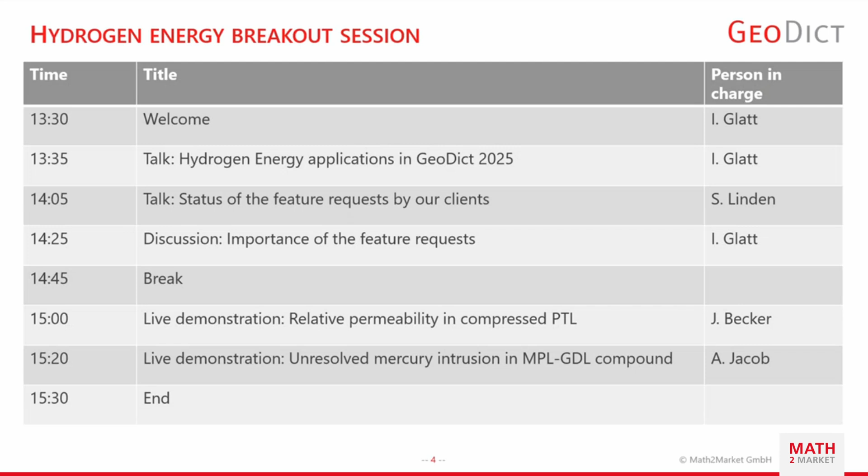So I will start with the applications in GeoDict for hydrogen applications. We've heard a lot about GeoDict 2025, which is new and out now. Maybe you're asking yourselves, what does that mean for me as a hydrogen researcher? I will answer that question, but not only for GeoDict 2025, but also for GeoDict in general.

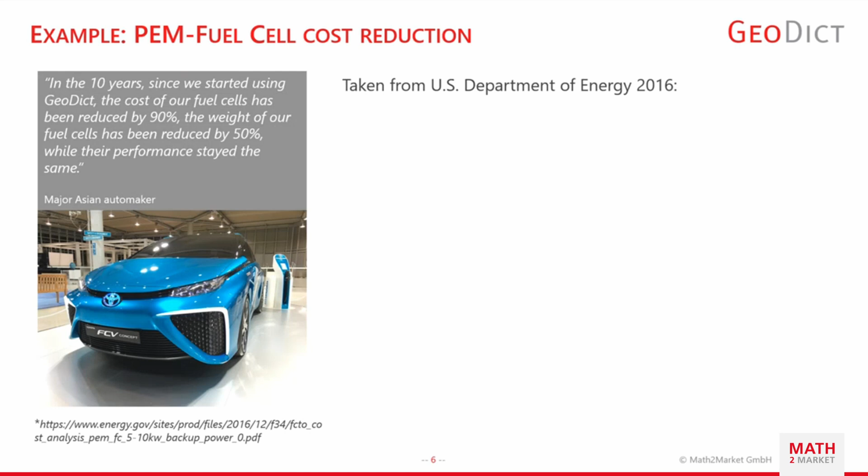To do so, let me give you an example. One of our clients once said, in the 10 years since we started using GeoDict, the cost of our fuel cells has been reduced by 90%, the weight of our fuel cells has been reduced by 50%, and the performance stayed the same. So what does that mean? If you follow on with an example, just imagine we would be talking about the Mirai. That's just an example, I invented that. And I have some numbers taken from the US Department of Energy from 2016, which is almost 10 years ago.

We imagine we have an annual production volume of 50,000 fuel cell stacks, and for this production volume, the MEA assembly, the membrane, GDL, MPL, and catalyst layer together, is roughly $12 per kilowatt in production costs. So if you assume that, and you assume also the power of the fuel cells in a Mirai of 128 kilowatt, the production cost for the MEA for one Mirai is roughly $1,500, and the yearly production of the Mirai is 30,000 per year.

So with the 90% reduction in production costs, we would save 40.5 million per year. So that's just an example, of course, but to give you an idea, I think it really serves well as a nice example.

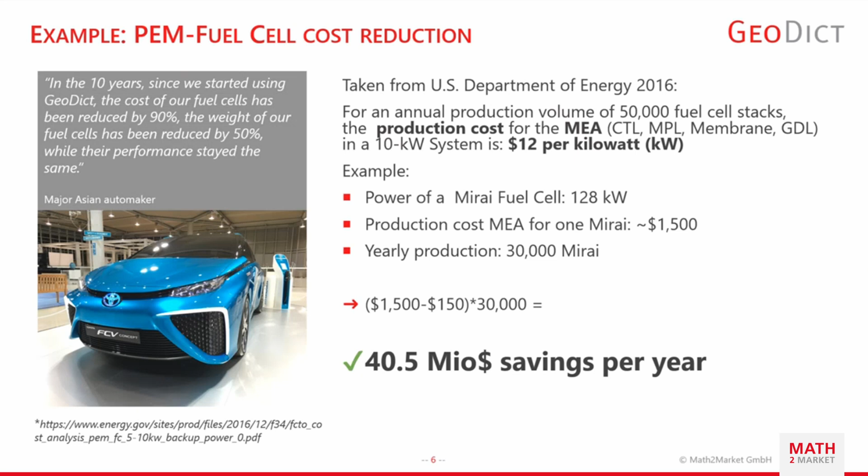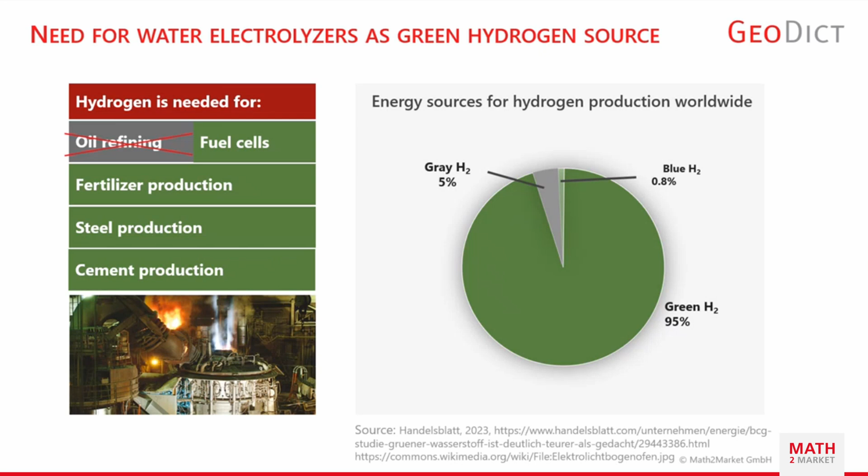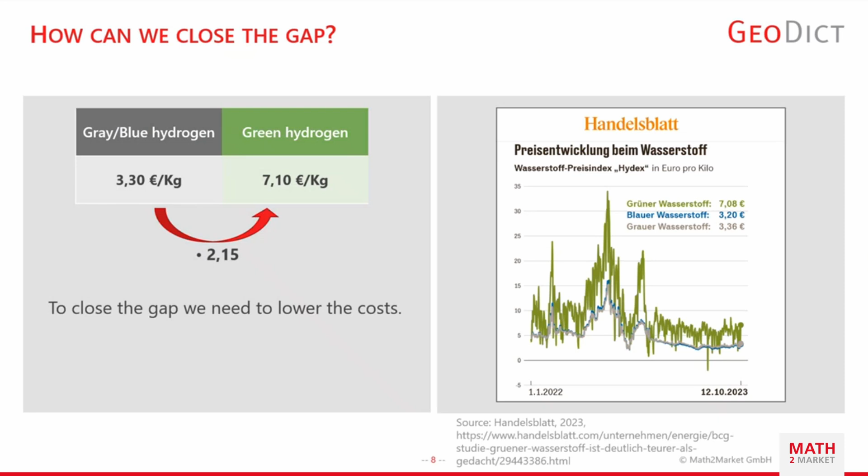So why isn't that the case already? That would be really cool, so why not? The answer is very easy and very hard to solve. The gray or blue hydrogen costs much less in production than the green hydrogen. So less than half the price. So what we need to do is to lower the costs, to close that gap between the costs for these two types of hydrogen.

And one way to lower the costs would be to improve on the performance. I know that's not the only thing that needs to be improved, but it's one part in the puzzle, improve the performance of the electrolyzers. And the question is not why to improve the performance, but how to improve the performance.

What can be done? The performance of the electrolyzers, and also for the fuel cells, is determined by transport processes inside of the MEA assembly. So we have to transport electrons, we have to transport gases, and we also have to transport water. That's true for the electrolyzer as well as for the fuel cell. And the network for the transportation needs to be well organized, like in a city. If you don't have it well organized, you will get traffic jams and obstacles, so the transport will not work smoothly.

And this is how the performance of the fuel cell can be optimized, by optimizing these kinds of pathways in the MEA assembly. And this is where GeoDict can be of use. To connect the microstructure properties or the transport properties that you determine in the microstructure to the performance, you usually have a 1D performance model, or maybe 2D, but at a larger scale. And you need input parameters to run that model. And these input parameters at least partly depend on microstructural properties.

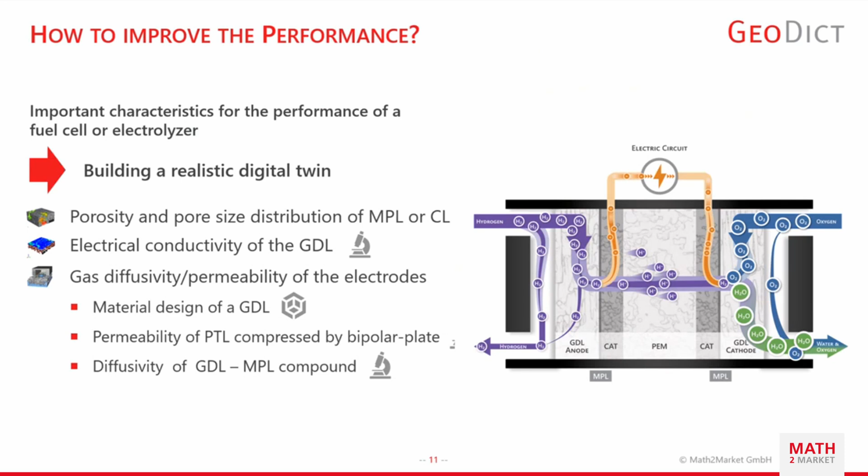And there's one thing we need to have a look at all of these examples. We need to have a structure. We need to have something that we can work on. And what we do here is we have a realistic digital twin of a real material in the digital world. So it's just a copy, so to say, in the digital world of the real material. And how do we get that? Let me show you a little bit how you get a structure into GeoDict, which we then can call a digital twin.

So the most straightforward way to get there is you would have a 3D scan. In this case, you can see a micro CT scan of a gas diffusion layer of a fuel cell. And if you scan it, you get gray values from the CT scan, and you can import this into GeoDict, and every gray value will become one material phase. And then you can reconstruct it in 3D, and you have a representation of the real material in the digital world, which you can already call a digital twin.

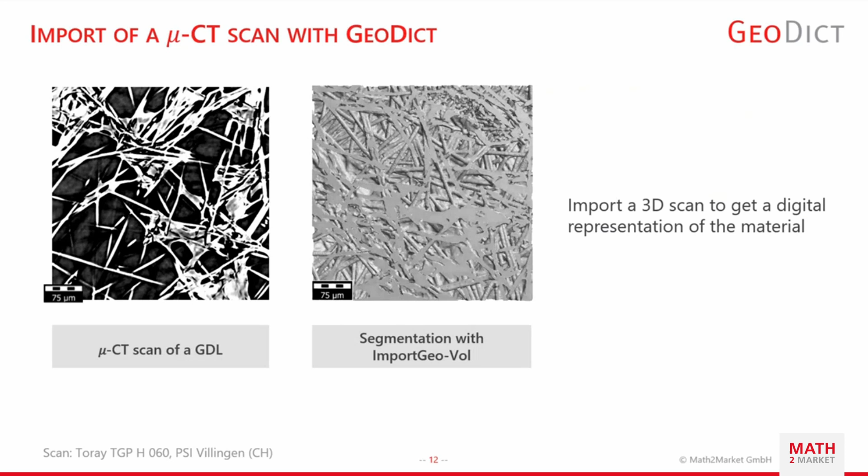So remember, if you have a digital twin like that, you have an exact representation of your material in the digital world. And in the case of the GDL, the individual fibers are exactly those as they are in the real world. They have the same location, same thickness, everything same. And the properties on the macro scale are identical to the original material. For example, you would have the same permeability of the material. That would be a digital twin.

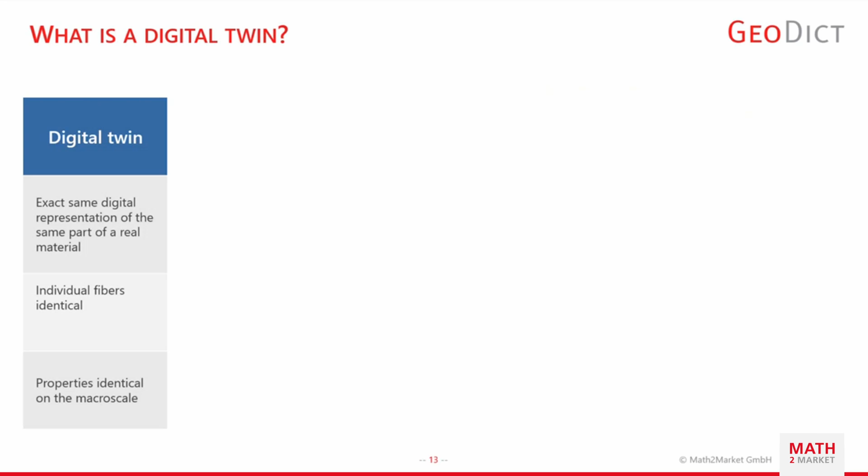Then we have a concept of a statistical digital twin, which is very similar, but not the same. With a statistical digital twin, you would have a digital representation of another part of the material. If you look at this image here, you have a carpet, and we have two different patches of this carpet. You would have the fibers in different locations. They would have maybe different thicknesses, the individual fibers, but in the statistical sense, you would have the same properties. It would have statistically the same fiber distribution, fiber length distribution, thickness, curliness. So you would end up with the same properties on a macro scale, like, for example, the permeability.

So if we want to do material design, which is what GeoDict is really good at, we need the statistical digital twin to be able to alter the material. For example, say we want to have a different fiber length distribution to end up with different properties on the macro scale. As long as we have the same properties on the macro scale, we didn't do any designing, right? So if we want to do designing, we have to alter the material. And this is what we need a statistical digital twin for.

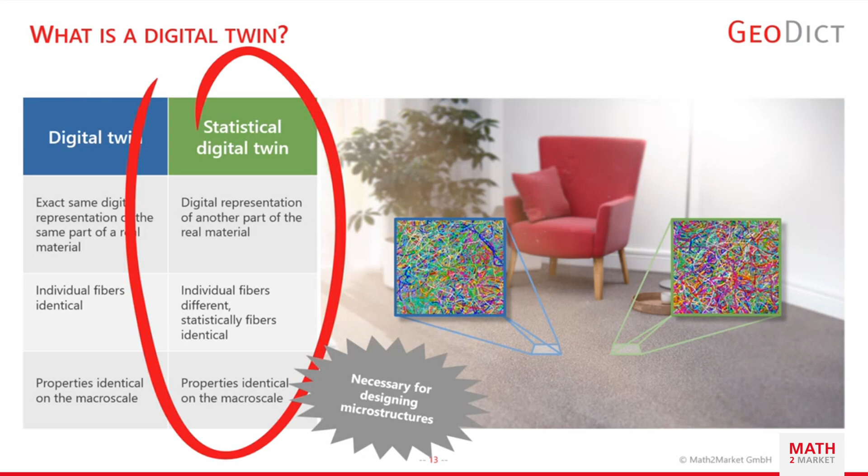In GeoDict, you have several options to create these statistical digital twins or structures in general. For granular structures we have options, and also for fiber structures, and also for sintered structures, which would be valuable for SOFC fuel cells especially. And then we have some options to make it a little bit easier to create realistic structures.

For example, we do have an agglomerate generator, which creates these kinds of agglomerates that you can see on the bottom here, like these here. And you can use these agglomerates and put them into a volume and generate a structure which is constructed out of these agglomerates. This is very helpful if you want to create, for example, a catalyst layer, which is done here in this example, because a catalyst layer consists of these kinds of agglomerates.

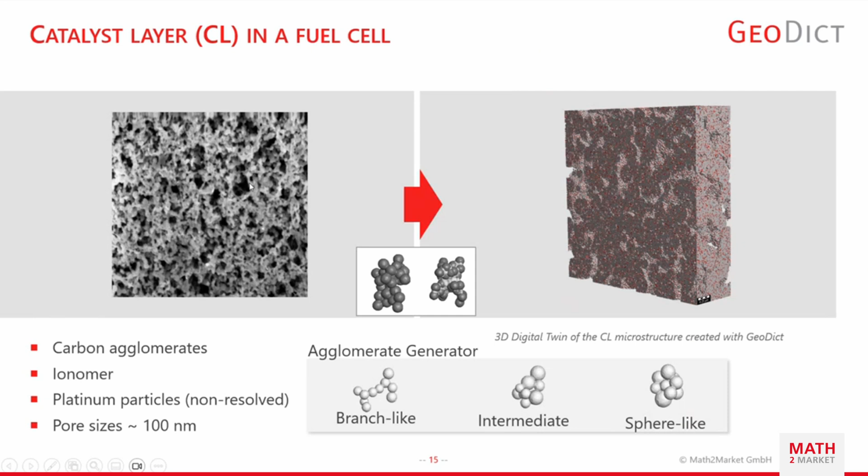And then you usually have a covering of ionomer, which you can add later on, and platinum particles and so on. But these kinds of agglomerates give you the typical pore size distribution that you have in this kind of layer. So you have large pores, as you can see, for example, here in the scan, but you also have these smaller pores in between the particles. And it's much easier to achieve if you have these agglomerates to start with.

That's another thing that we already heard about in the plenum session, the 2D to 3D app, where you can use 2D scans to get a 3D structure. I was actually impressed by the 3D TEM scans. But if you have TEM only in 2D, that's a different thing, of course. Same for FIB-SEM scans. FIB-SEM scans are very difficult to get, especially for the microporous layer, or even worse, the catalyst layer, because they're very, very small particles and it's mechanically not very stable.

So if you want to have a good image of that, I have never seen one, which is actually one of the reasons why we started with the SOFC cells for the 2D to 3D app. Now it's also working for battery structures and for fiber structures, but we're still looking for a really good scan of an MPL or catalyst layer. So if you have a really good scan of an MPL or a catalyst layer, we would be very interested to work with you on creating or improving the 2D to 3D app using that kind of scan. So please let us know.

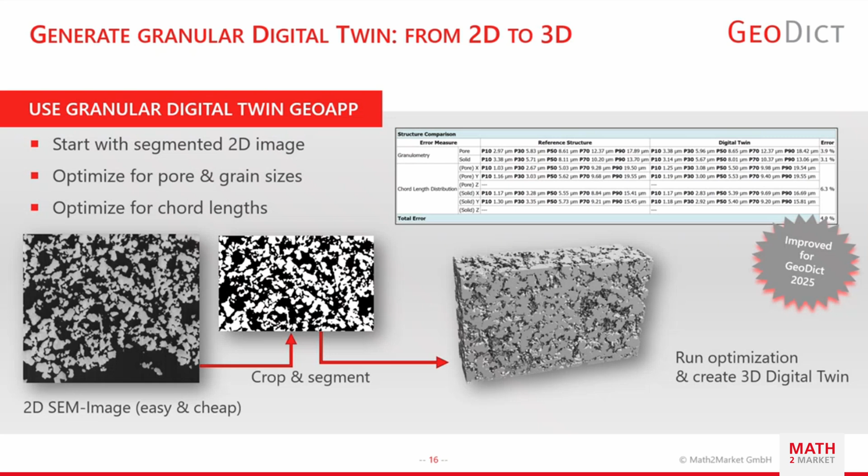And the exact same graph you get in GeoDict if you run a mercury intrusion experiment. Then you can compare the digital experiment with the real experiment and see, does it fit? If it fits, you're probably fine. And you can go one step further with the simulations, because with mercury intrusion, you only get the throats of the pores, or the sizes of the throats. And for the transport, it's also important to know how big the pore is inside, so the pore body. And this is something that you can get with GeoDict.

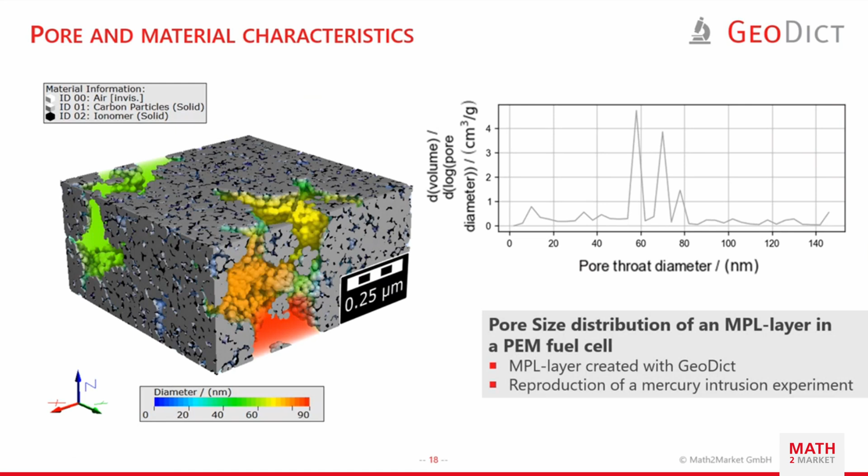What you can also do in GeoDict is visualize the pore sizes in 3D. So here you have in 3D in color the size of the pores, and you can just see how big the pore is that I'm currently looking at. For example, this pore is in red, so that means I have a very big pore here. Here are very small ones, they are blue color coded. So you have two options, either reproducing the experiment or even going one step further.

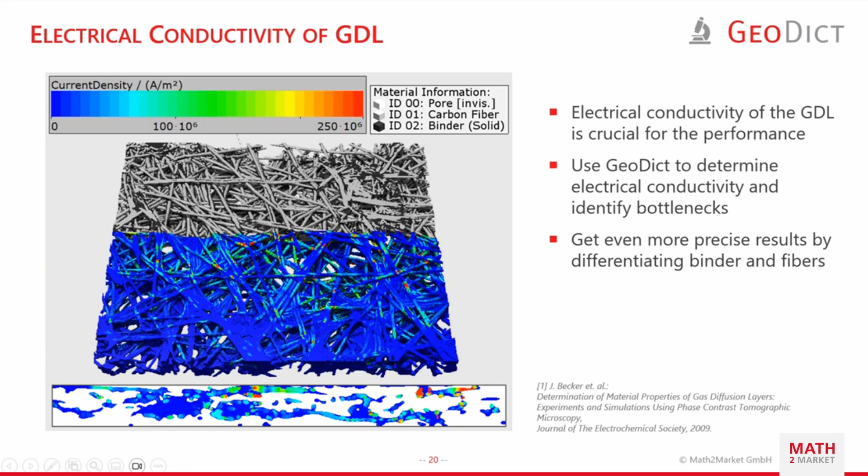So you've seen the porosity analysis, and now let's go to the electrical conductivity of the GDL. What you can see here in gray is the gas diffusion layer of a fuel cell, and you can calculate the electrical conductivity of this structure, and you get, for example, current densities in 3D, and you can see if you have any problematic areas, like for example here in the red ones, or here in 2D. You can also analyze it and slice through and see in more detail where there could be any bottlenecks for transportation.

So let's move on to the most difficult task, so to say, the gas diffusivity or permeability of the electrodes, depending on the water saturation or on relative values in any case. We will start with the materials design. So it's a design study which has been done quite a few years ago of a gas diffusion layer.

I think it was done by Jürgen Becker. So if I tell something wrong, please correct me. It was, I think, in 2009 it was done. There will also be a citation later on.

You could also assume different or more complicated ways of how the water enters into that layer. But for this study, it's not the important part, actually. So we'll leave it with that way, and we'll start saturating that layer from the bottom. The idea here is, we can just have a look how that saturates. So we have the water entering from the bottom and saturating the gas diffusion layer until it's more or less completely filled.

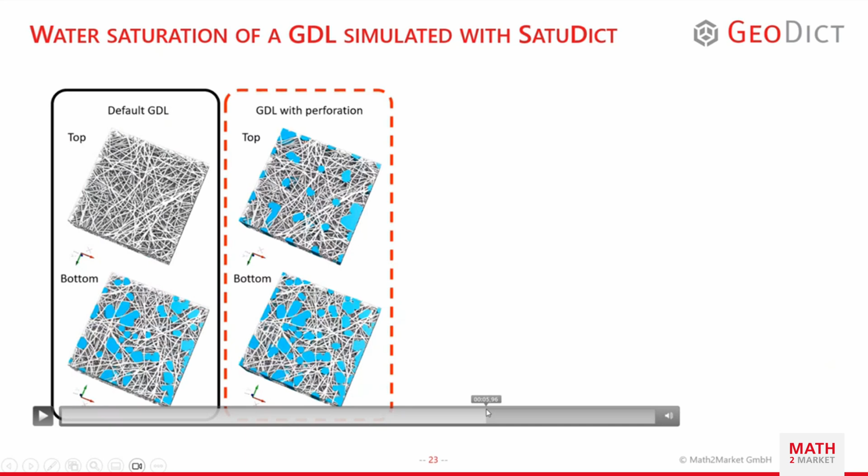So let's see how the saturation looks like. So it starts at the same location. And you see, okay, at least qualitatively, that works. We have filled the holes first. The punched holes are filled with water while the rest is still open for the gas transport. Does it also work quantitatively? Well, let's have a look at that.

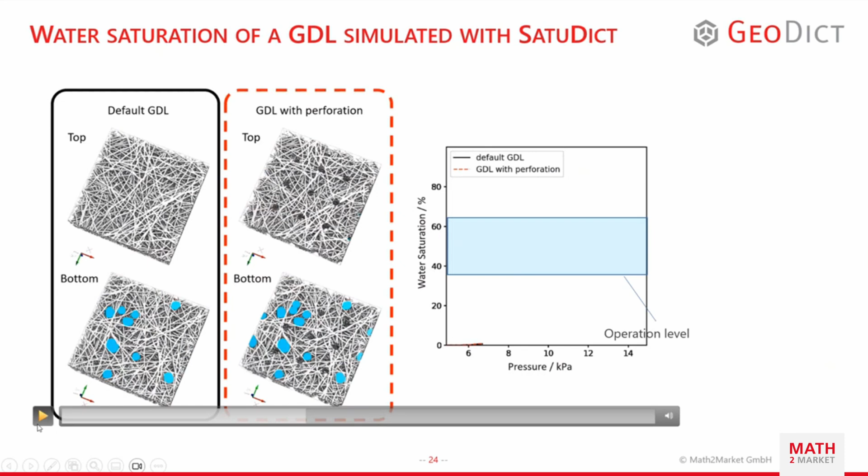Wait a second. If we look at the graph here, on the y-axis, we have the saturation with water in percent of the two GDLs. And on the x-axis, we have the pressure that is needed to get the gas through the structure. And if I let the video run, we can see that for the perforated GDL in red dashed here, we get a different graph than for the default GDL.

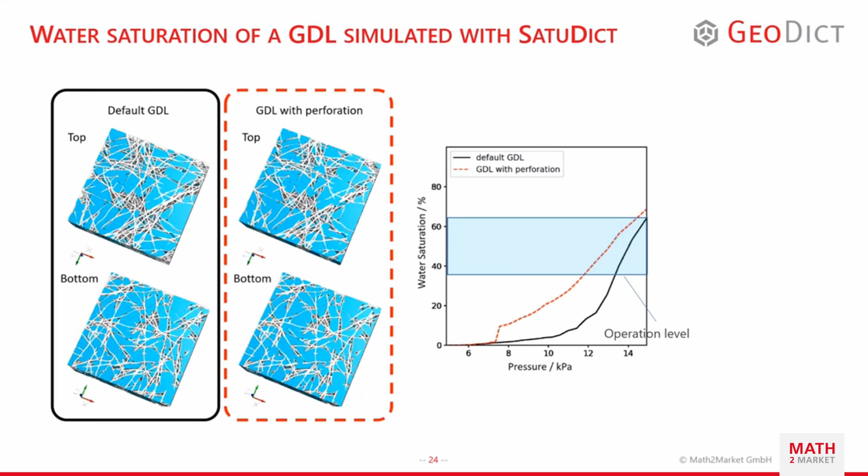And in the typical operation level, it's actually a little bit wider than it's shown here, but more or less. So in the typical operation level, we see that we need less pressure for the gas to go through at the same saturation level than for the non-perforated GDL. So in this study, the structural design, the material design worked out. The water fills the perforation first, and it leaves the smaller pores for the gas transport, allowing for higher permeability at the same saturation.

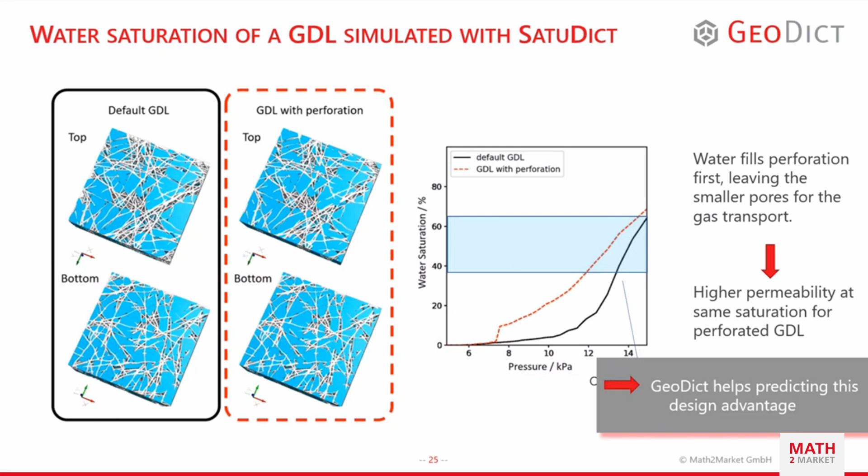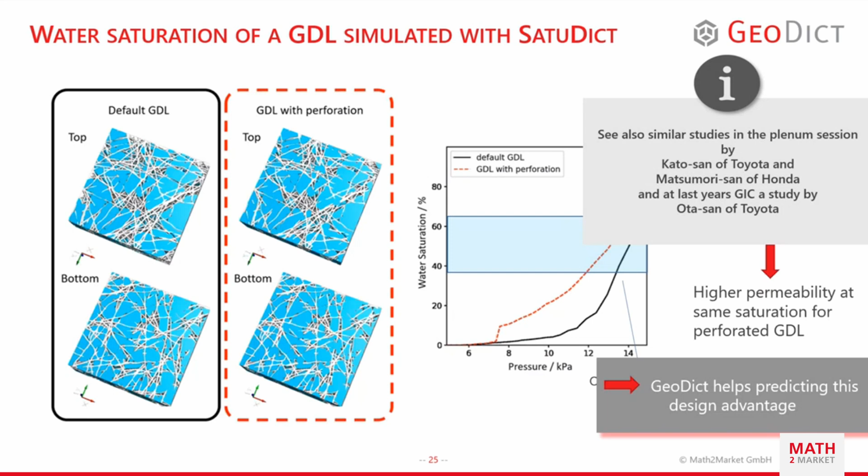Yeah, we have already seen the plenum talks, so we can refer to that. And this was the real world. I mean, this is a study which is done in a publicly funded project, and you're doing the real research, for real applications. Now let me show you a little bit what the permeability of a PTL compressed by a bipolar plate is good for. We're talking about electrolyzers now, but it would be also true for fuel cells if you look instead of the PTL at the GDL.

And if we want to go into a performance model on a higher scale, we need to enter a permeability value. And the permeability that we get from the relaxed structure is different than the one that we get from a compressed structure, of course.

The trouble is if we measure, or if we image the PTL with a scanner, it's usually in a relaxed state. So if you use this image of the relaxed state and calculate the permeability or the diffusivity of the structure and enter this into the performance models, it will probably not be the value that you have during operation. So if you want to have the value that you need for simulating operation conditions, you need to use the compressed structure.

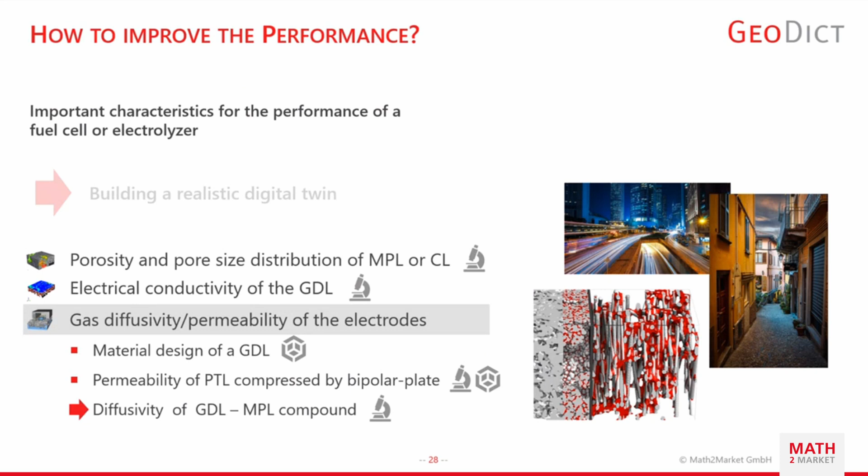So the last example I want to talk about is related to the last talk in the session here, which is the mercury intrusion curve that you get from the compound of the fibers and the microporous layer. So why would you want to do this? Well, scans of the microporous layer or catalyst layer are very hard to get. We already had this topic.

So what you usually do if you want to have a scan of this compound, you scan it together with the GDL. And then it's usually not resolved. So the MPL is not resolved, or you can't really resolve that. So what you can do in GeoDict now is you assume a porous medium for the microporous layer, the one here on the bottom. So for each voxel, you have pore inside as well as solid material. And you say, okay, my porosity, I know that, can assume that.

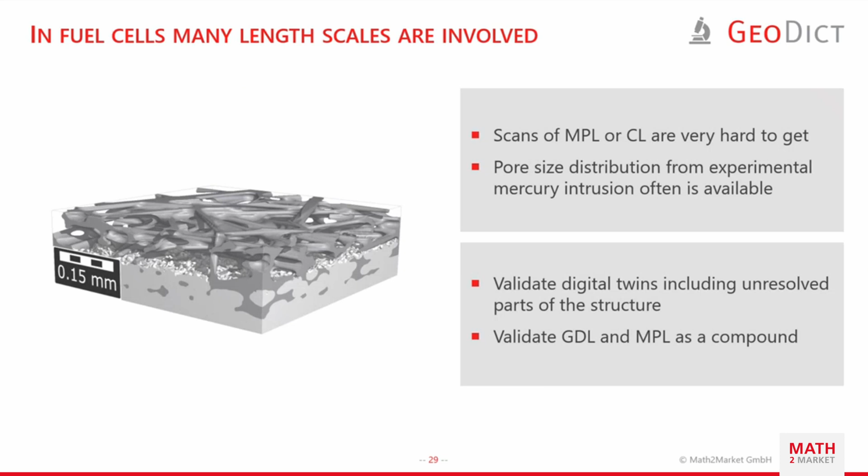And then you can calculate the mercury intrusion for this entire compound. And you get then the analysis for this entire structure. You can use that again for going into performance models as an input parameter. All right, so that was what I wanted to show you as an introduction to this session.

The most important thing is the microstructure directly influences the performance of the fuel cell or of the electrolyzer. And GeoDict can help you to design that microstructure in a fortunate way.

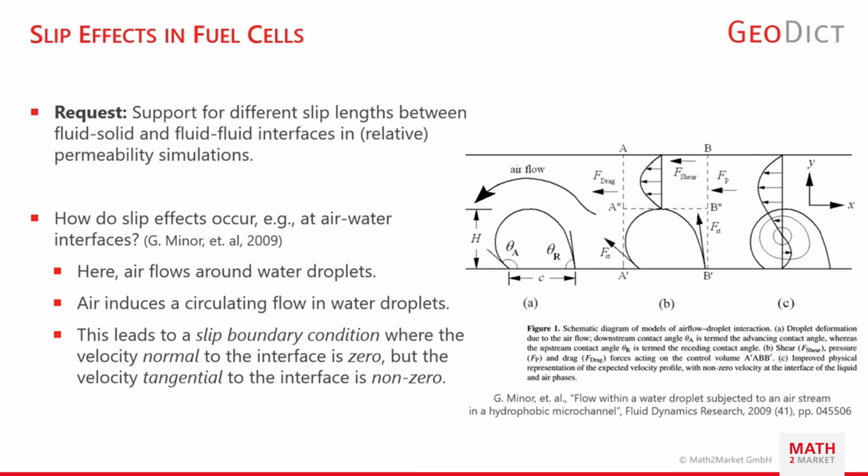What happens now if the airflow is fast enough, you get a circulating flow in the water droplet. On the right part of the image, you see a circulating flow inside the droplet, and this leads to slip flow like boundary condition at the interface between air and water.

What you can currently do is emulate this kind of feature with GeoDict and FlowDict. So what you can do, for example, is a two-phase flow simulation with the capillary pressure command, and then you get a sequence of different water and air distribution. Now you're not using the relative permeability command in GeoDict, but you go to FlowDict and compute flow.

But before you do this, you can use the dilation command in ProcessGeo, and you dilate. For the example from the slide before, you dilate from the air into the water and then do the flow simulation. This emulates slip flow behavior between air and water, but you still have no slip between air and, in this case, the fibers.

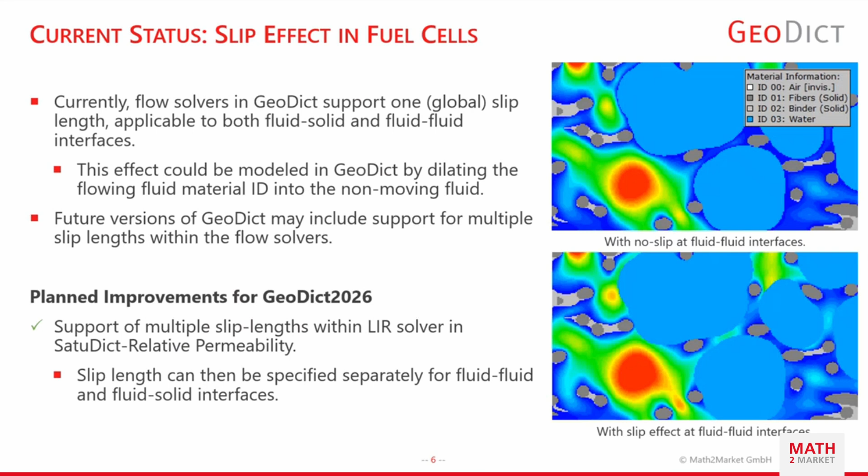So you can already do emulation of this boundary condition. What we plan to do in the next GeoDict versions is allow you to specify different slip lengths for the different phases. This we can do in the flow solver. It's not available yet, but this can be implemented, and it may be implemented in GeoDict 26.

The next feature request is about improving the mesh export. The request was to have more stable mesh export to be compatible with other simulation software like COMSOL, ANSYS Fluent, or Abaqus. This is important because customers may already have a software environment, and they want to use their own simulation software, but they want to use the structure generators from GeoDict.

This can be difficult sometimes because meshes can be quite big with a lot of triangles, and other software then has a hard time importing and meshing it for their simulation. Sometimes importing fails, maybe because of self-intersection of the mesh. If you do coarsening, you can introduce errors.

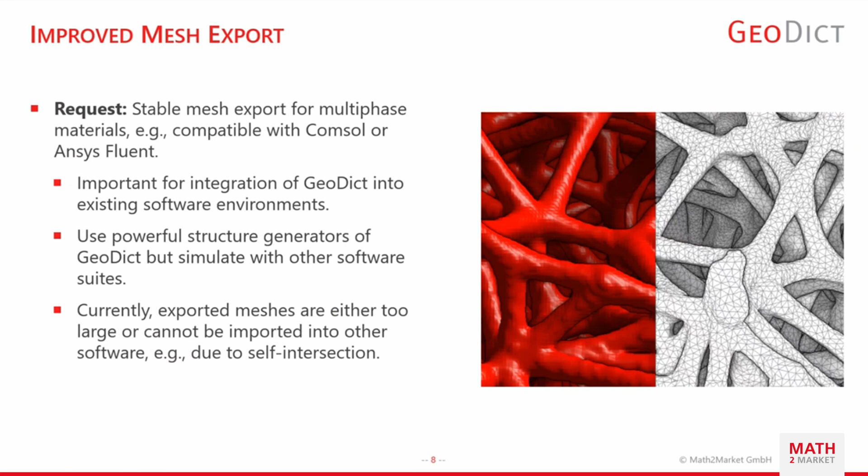So here we want to do major improvements, and this is scheduled, and we are already working on this. In the last month, workers started doing improvements here. We want to improve remeshing algorithms to decrease the number of triangles but preserve high quality meshes, especially where two materials touch. We will do more work on this to make the exported meshes better compatible with simulation software.

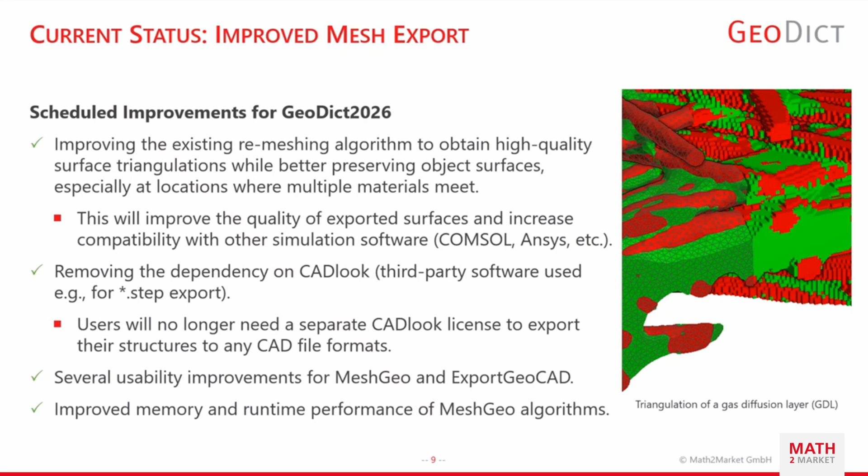Another thing we want to do is remove the dependency on CADlook. If you want to export a mesh in the so-called STEP format, you have to buy another license, a CADlook license, and this makes it more complicated for the user because you need a GeoDict license and a CADlook license, which isn't so nice. We want to remove this dependency and replace CADlook by something else. What else, I cannot tell you now, but we want to remove it and make it easier. And of course, other improvements, reducing runtime and memory and so on.

Hydrogen flows through the anode side, and some parts of it will lose its electron and travel as protons through the proton exchange membrane. On the cathode side, it will merge together with oxygen through the oxygen reduction to form water vapor. For research, the cathode side seems more interesting because here you have water production, and water can condensate, which makes it much more complicated. So research happens on the cathode side.

Research questions include: is enough oxygen always available for the oxygen reduction reaction, since performance depends on this? How well is water transported out of the cathode side? And what about the platinum? The oxygen reduction happens at places where you have platinum, which acts as a catalyst, and how well the fuel cell performs depends on the distribution of platinum and how it influences oxygen diffusion.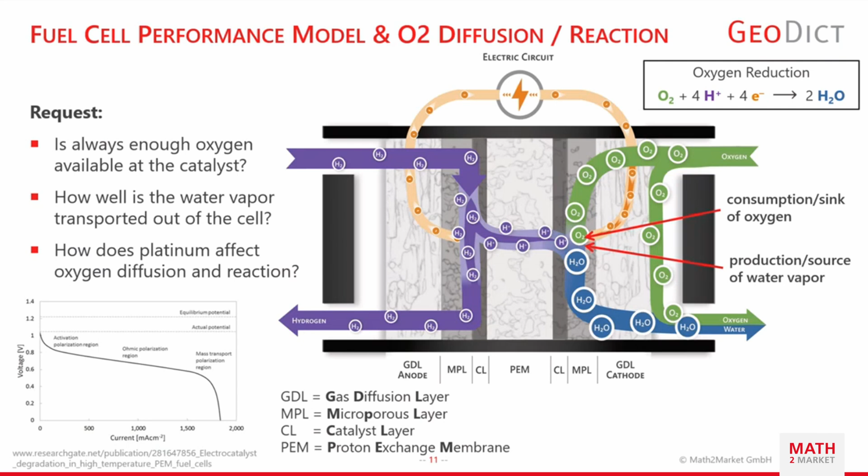What you can already do with GeoDict 25 is simulate the transport of oxygen and the transport of water vapor, not liquid water, but water vapor. Tomorrow my colleague will give a talk about our new transport solver available in GeoDict, which allows transport of concentration on a given velocity field.

We can use this in combination to simulate this phenomenon. So if we assume we just have air as a solvent, with oxygen and water that stays as vapor, and if we assume enough protons and electrons, constant temperature and pressure, and that the microporous layer and catalyst layer are not resolved, we can do the following.

First we run a flow simulation through the fuel cell, then we use the transport solver to transport oxygen and then water vapor, transporting concentration with a velocity. Between different time steps we use an update rule, which can be implemented in Python to apply the oxygen reduction equation. So iteratively, for each time step, you transport oxygen and water vapor, do the reaction in Python, and with that you can simulate an evolution.

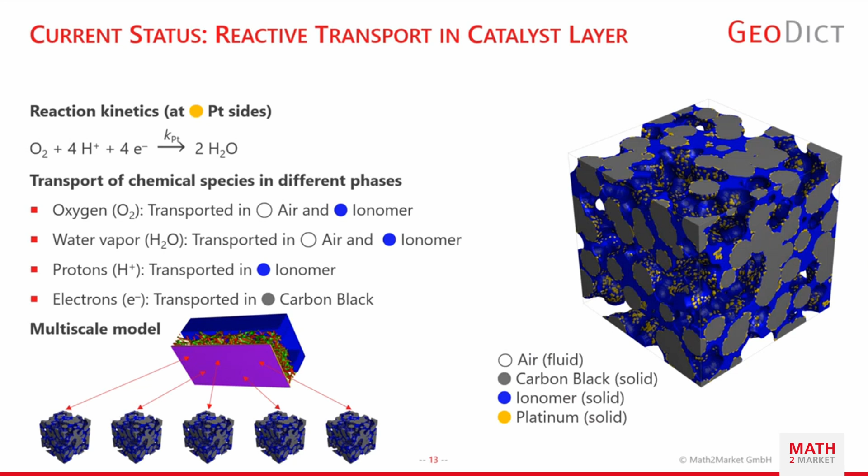So the last topic will be about 2D to 3D. As you've heard, we have two GeoApps in GeoDict 25. With one you can create statistical digital twins for fiber structures, and we have another version designed for granular structures. We tried testing if we can also model a catalyst layer.

It's not ideal yet, but you can already see that it's similar. The reason it's not yet ideal is because there's an internal generator model, as Eric already told you. To get a better match with the input image, some more work would be needed to tune the generator model so it fits catalyst structures better. To do more work here, we also need real images.

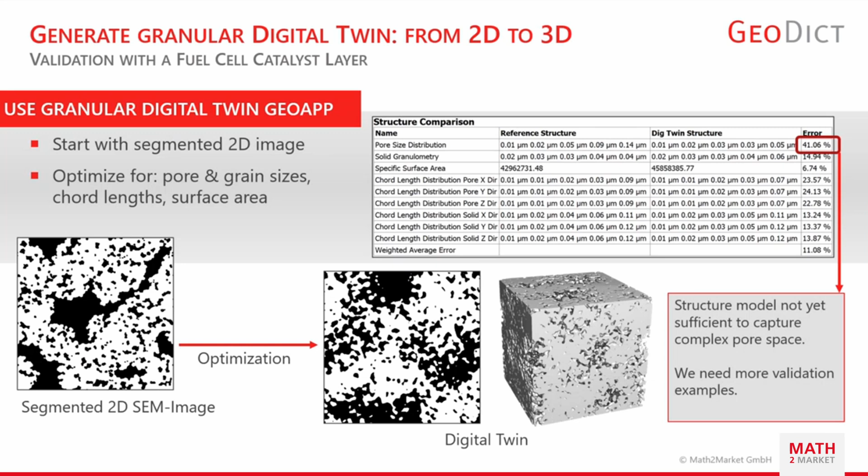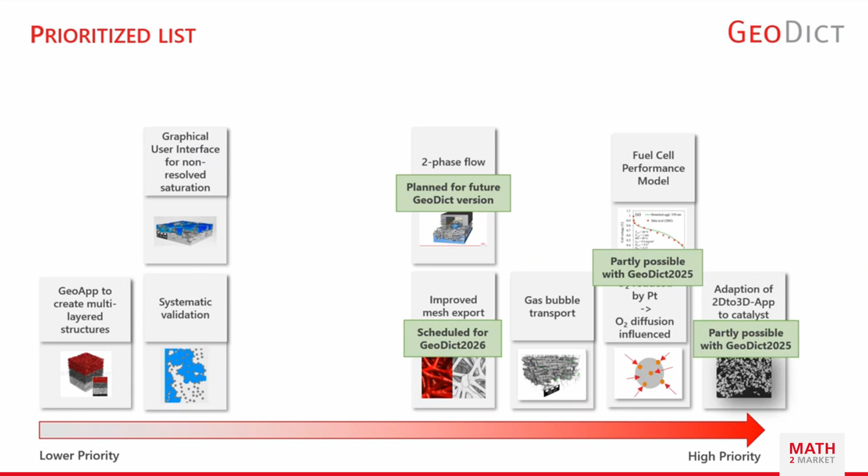So this would be the end of the presentation. Some of the requests are partly possible, and some are planned for future GeoDict versions. That would be from my side. Thank you for your attention and for the discussion.

So we can start now with a live demonstration. The beginning, I think, is not live because you have some introductory slides for that. I already gave the motivation, so I think you will give your own motivation soon. I hand over to Jürgen Becker, our head of the support team.

Thank you, Ilona, for the introduction. I came to Kaiserslautern after finishing my PhD in mathematics in 2005, and then started working at Fraunhofer Research Institute. My first industrial project partner was Ballard Power Systems, so I started working on fuel cell research. Unfortunately, at that time, anything I'll show you in the next 20 minutes wasn't available yet, so we couldn't do all the nice things I can show you now. The topic of the project was doing permeability computations on gas diffusion layers, but nothing of what I'll show you in the next 20 minutes was available back then.

We started working on it, and now 20 years later, it can all be done easily in GeoDict, which is quite nice. So I will show you how to compute relative permeability in a compressed porous transport layer.

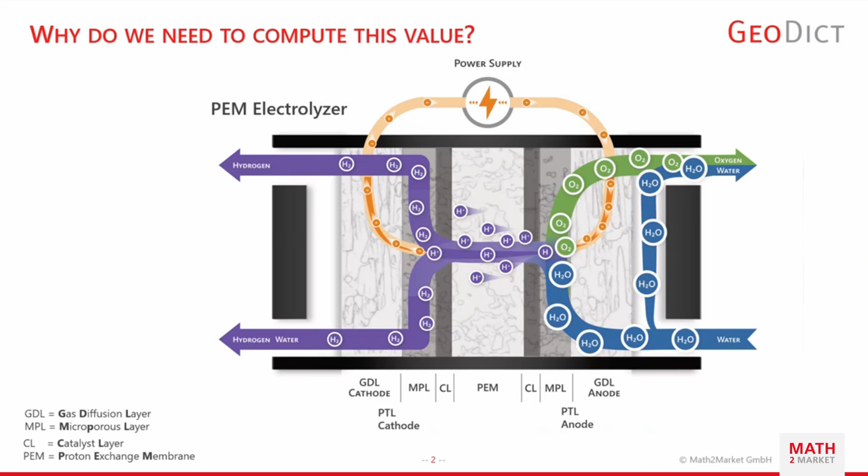Why do we need to compute this value? We're looking at an electrolyzer, where the porous transport layer is a gas diffusion layer or microporous layer. This has to provide gas and water permeability, same as in a fuel cell, and it has to operate under different saturation levels, so oxygen is sometimes present as a bubble. In a fuel cell it's the water in a bubble instead, so it's the other way around, but it's the same question.

The layer is also deformed through the clamping pressure that we have. So if you look at it ex situ on a CT image, it's not the same as when it's built into the electrolyzer or fuel cell. So you have to look at different compression levels.

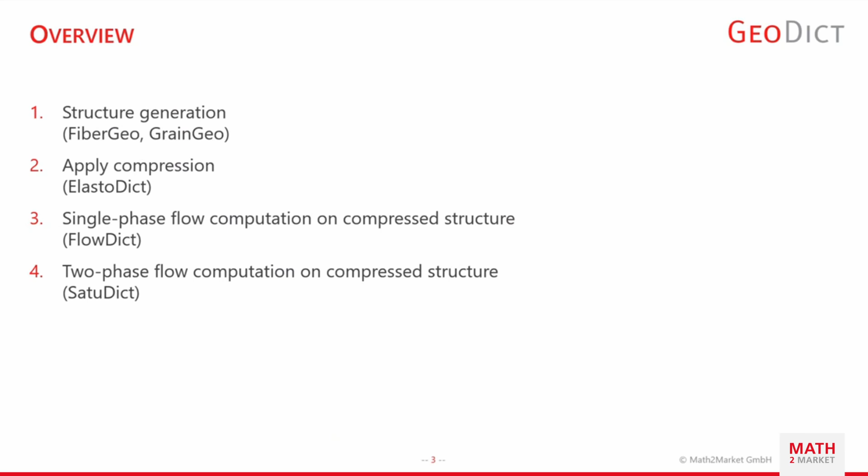I will give a presentation on how to do the structure generation with FiberGeo, GrainGeo, how to apply compression on it, how to do the single phase flow computation, and how to do the relative permeability, which is two-phase flow computation with GeoDict. Of course, not all computations will be quick enough to fit into 20 minutes, so I will sometimes load some pre-computed results.

So how does such a titanium porous transport layer look like? If you Google it, that's one of the first hits — it points you to Bekaert's homepage, and they show you this kind of model. It consists of some fibers, and that looks like something we can also do with GeoDict. If you surf around on their page you also get this picture, which also looks like a model, along with information on typical porosities and thicknesses for such titanium porous transport layers.

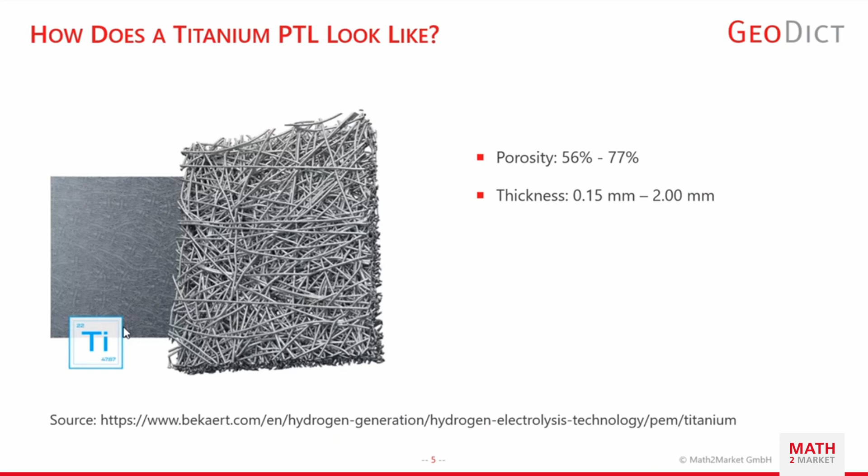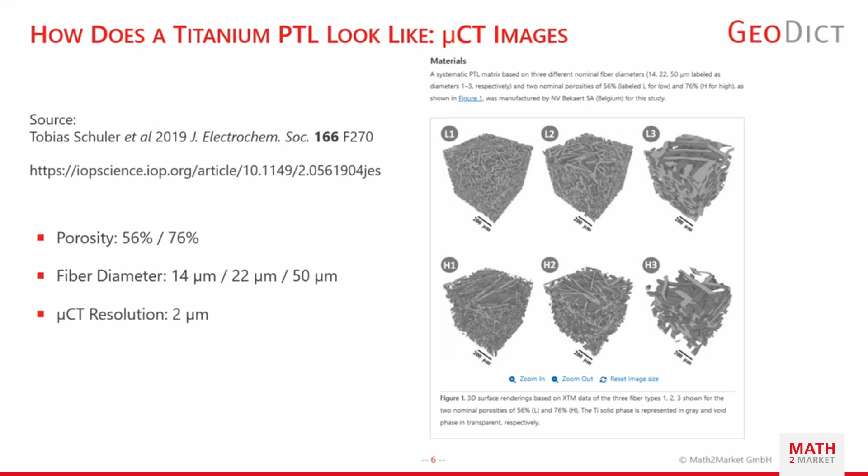Also on the internet, you can find micro-CT images done at Paul Scherrer Institute, showing this exact same fiber type. They have fiber diameters between 14 and 50 microns. So let's take these values and try to do something in GeoDict that looks fairly familiar, then do some simulations on it just to demonstrate how it works.

So in GeoDict, to make a fiber structure, we have to use FiberGeo — create fibers. We open that, and we choose first some domain size that fits here. I'll do something like 500, 500, 200. So this will be 1 millimeter in the XY and 400 in the thickness.

We have to set a solid volume percentage, so the porosity — we take here 77, the upper end of what was on the homepage. We have to say what type of fibers we want to model. We remove the defaults and say we'll take curved fibers with circular cross-section. We have to set a diameter, taking maybe the 22 microns, the intermediate value from that information. We have to make the fibers longer than the domain size so they go through the whole domain.

One thing we also have to set, since we're taking curved fibers, is some values for the curl. That's a little complicated to understand. We can decide if the fibers tend to keep the local curvature or the local direction — if we say they should take a bit of both, they don't zigzag but form smooth curves. Global straightness means whether there's some global preferred direction to the fiber's orientation, or if it's free to bend into another direction. That's one of the points where, if we want anisotropy, we have to give it a global direction. And if we want it in-plane, we reduce randomness in the Z direction. So you can play around with these values a little bit.

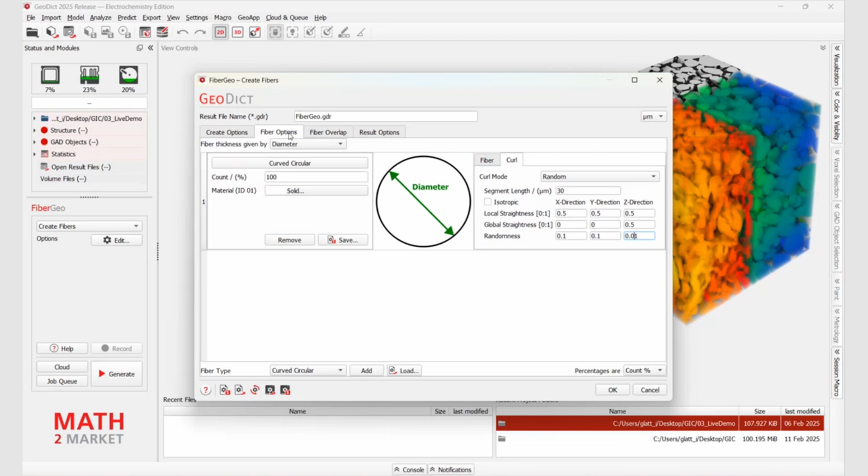There's something that can be optimized to match a certain realistic structure, but we'll just take it for now. If we do it for modeling, we should remove the fiber overlap, but that takes some time, so just for the demonstration I let the fibers overlap with each other — otherwise I'd choose without overlap, and then the fibers would not overlap in the resulting model. So if I do that and click on generate, just let it generate.

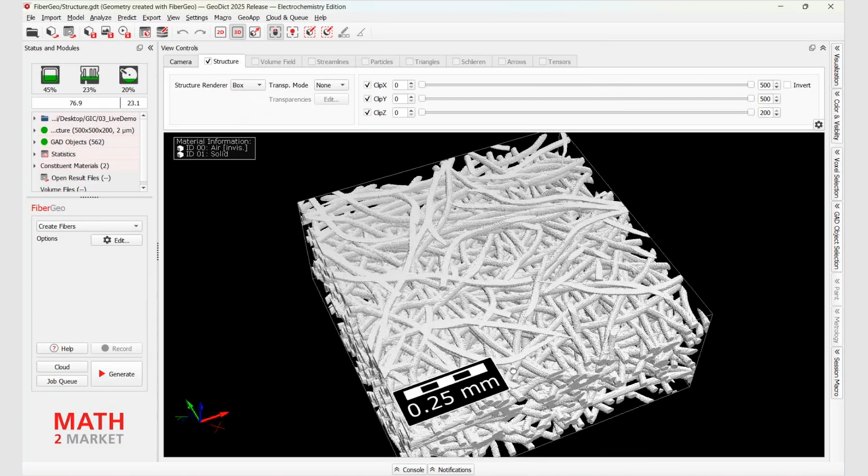And then we'll have the structure here in 2D. I switch to 3D. I have here the structure, and I will improve a little bit here on the visualization so that it shows a little bit nicer.

So we have here now a structure, and we can see that fibers are still allowed to overlap here. But yeah, as I said, if I set the checkbox differently, then this overlap will be removed, and the fibers will not overlap, which is more realistic, but it takes a few minutes more to compute. So

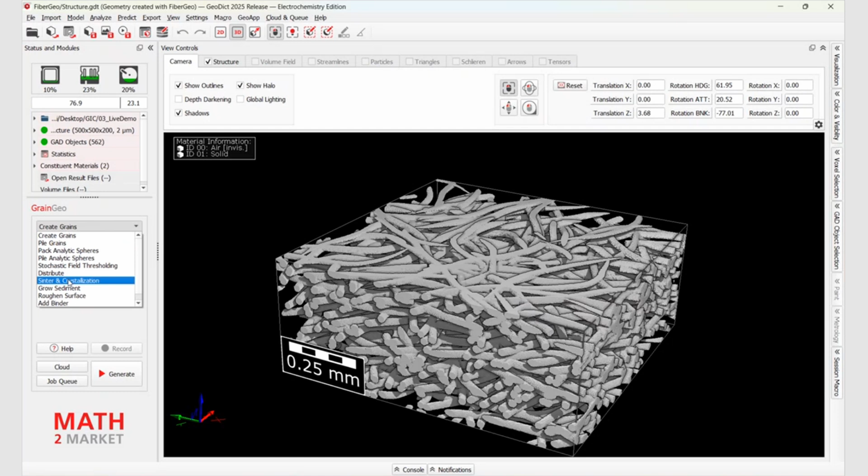the titanium fibers are actually sintered titanium fibers, and there's one way to model that I actually will shortly show, because I think it's unknown to many that these things exist. In GrainGeo, we have here sinter and crystallization, and you can actually use that not to model the sintering process, but to mimic kind of the effect of a sintering process. So it will just shrink the structure, so it keeps the grammage, but not the volume.

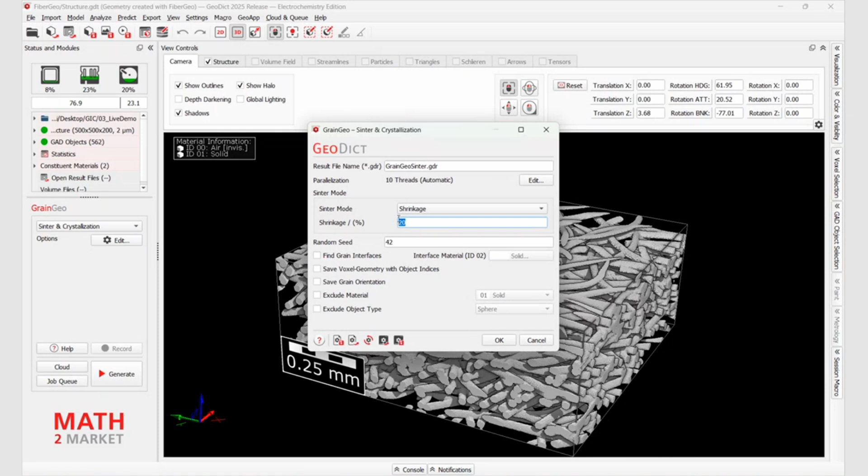Yeah, so that's the effect, and I can set this to a shrinkage, and if I say it should shrink by 10%, it will actually compute for about 40 seconds, and as I said, it will keep the grammage but reduce the volume. It will keep the same amount of voxels, but reduce the voxel length and make all the fibers a little bit thicker and glue together, and then it mimics a little bit the effect of a sintering process.

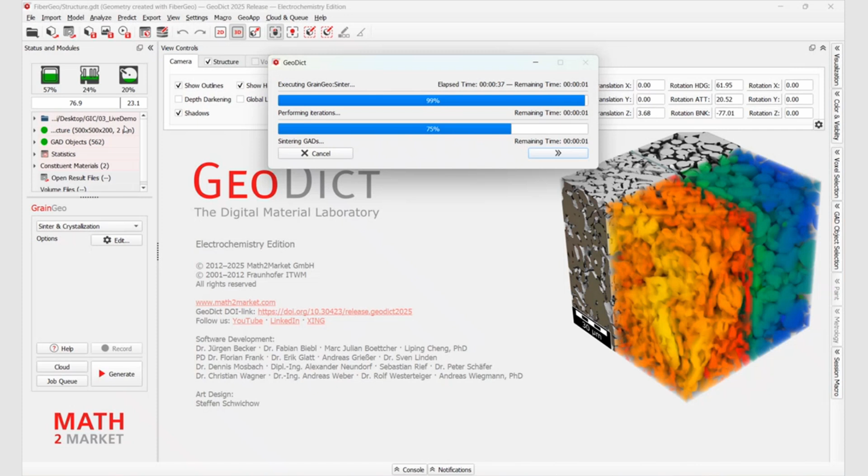Yeah, you can check this out if it matches to your models. So yeah, you see here, it looks a lot denser now if I do the sintering.

So if I want to compress this structure later on, because I'm interested in the permeability under compression, because in situ it's compressed, I have to do a compression modeling with ElastoDict. ElastoDict offers a number of possibilities, and we have to choose the deformations. And in the deformations, I have to set, oh, this is still solid. This should be the material, should be titanium, of course. Yeah, so I have titanium. Well, doesn't matter because it's only this that has some stiffness.

And I have to define the load case here. So if I want to do compression, I have to choose compression. Path control is okay. In the boundary conditions to the sides, I have to say it's confined. It's not free. The structure continues, so there's not free space in all the sides. I have a compression in Z direction, so that's the through plane.

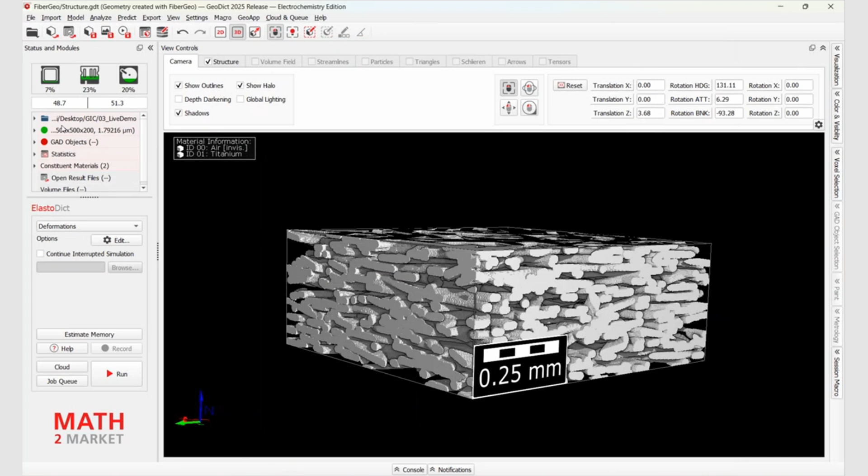I get new contacts and a stiffer structure as a result of that, and I will get this typical stress-strain curve. It will be nonlinear. So that's important here in ElastoDict. And this one, I'm sorry, I can't let it run here. This takes a little bit too long. So I go to the pre-computed results and show what it looks like.

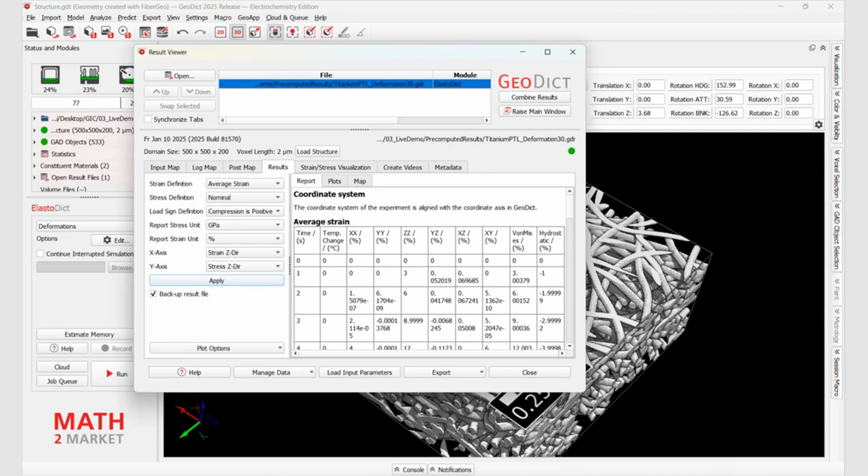So first of all, this was done on a different realization of the structure. This is the structure before the compression. And afterwards, I have here the results. You get stress-strain results. I can show the plot here. You have here the strain up to 30% in these 3% steps, and you can see that you have this nonlinear increase because you have additional stiffness due to new contacts.

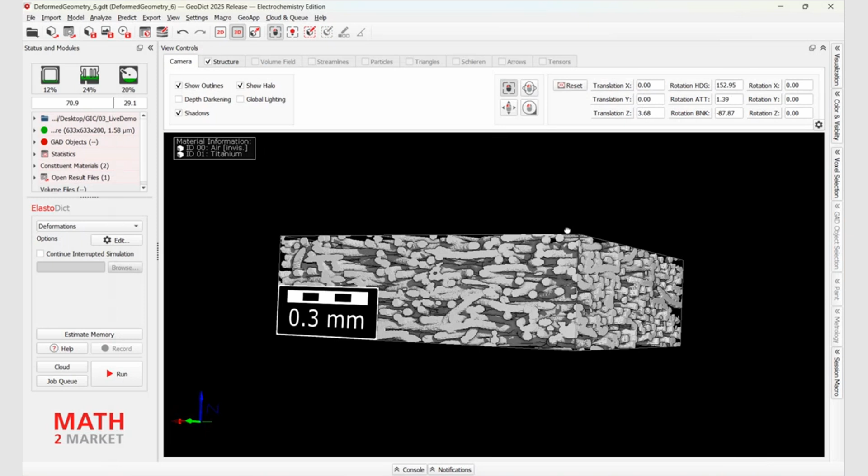So here, under the visualization, you can actually select for all of the steps the deformed geometry, and you can just load it. So you have the geometry available. If you load it, it shows the compressed geometry at this level. And now I can compute things just on this structure. I have it for everything, so I can just compute in GeoDict the flow. And this goes rather quickly.

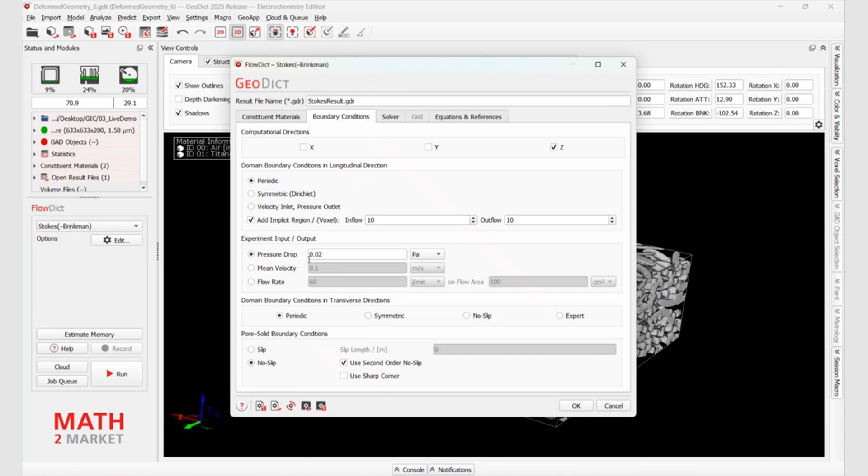If I just compute the permeability in the Z direction in GeoDict, I can select, okay, it's water maybe in the transport layer. I don't have to change anything here because for permeability, the exact pressure drop doesn't matter because I just compute this permeability, and this will be the same. And I can leave all the default parameters and just click run and let this run for a while. And while it runs, I show a few slides.

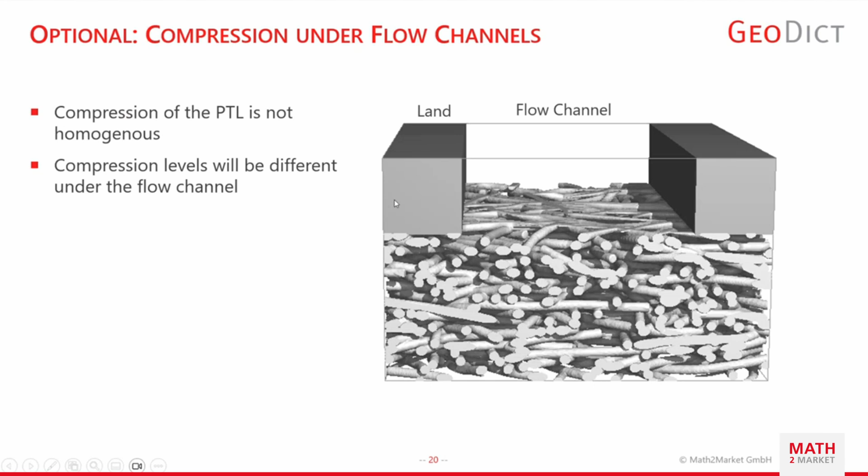And I think we have seen this image a few times today, and that's because we are actually pretty proud that this now works. It's not so easy as it looks. It was several years of development, and if you would have asked me 20 years ago if such a simulation is possible, I think everybody would have agreed that it's not possible. Sometime in between, 10 years ago, I think Hyundai asked if we can do that. We said not this year, but next year, and that was a little bit too optimistic. It took a while longer, but now it really works nicely, just out of the box, and that's great.

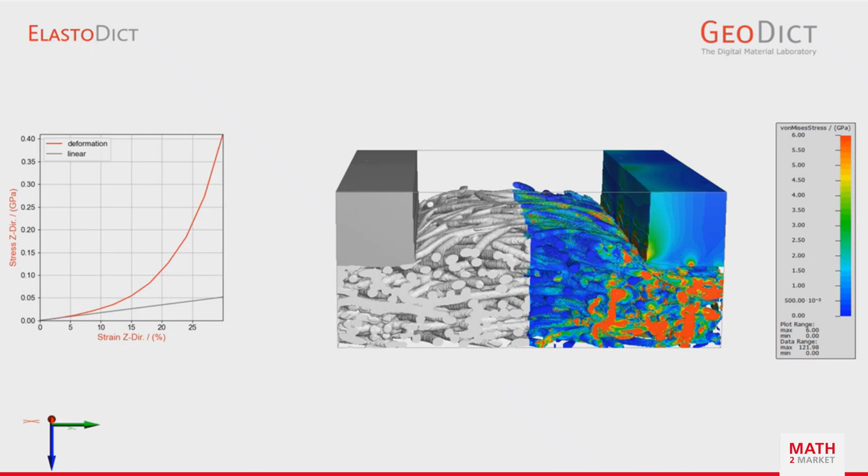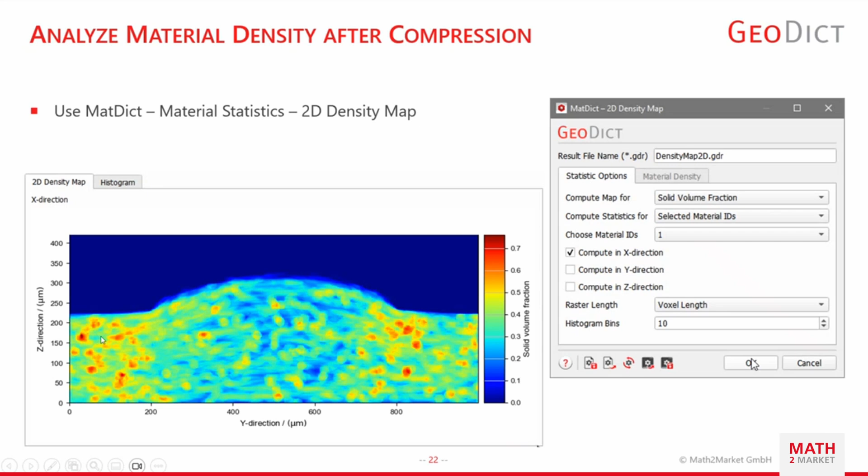And you can analyze this compressed structure, for example with the 2D density map. You can have a density histogram from the side, and you can see that there's a denser compression under the ribs. And if you choose different values, you can choose how big to rasterize it here. So you can get some other statistics there as well.

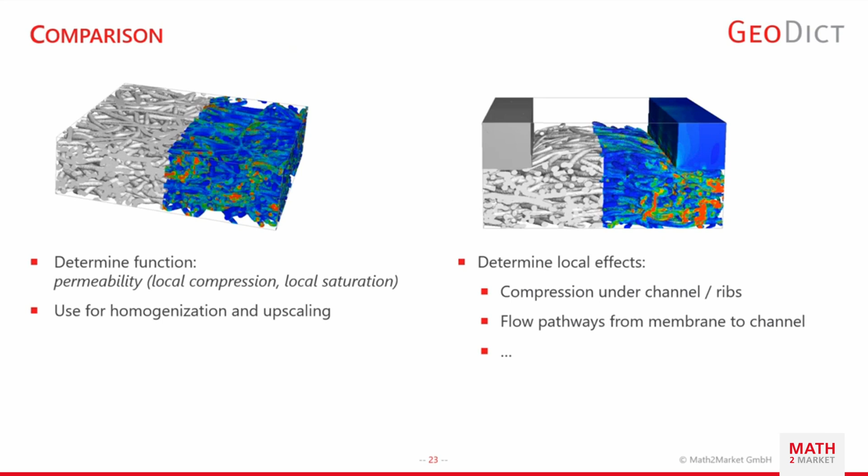Yeah, and now if I switch back and everything works as we hoped for, we are exactly at 100%. Great. And the simulation is finished, and we get the permeability now.

What did we do? We computed the permeability for this one compressed structure, and it's written in here. It's for the through plane. We haven't computed the one in the in-plane direction. Of course, if we just make the check marks, we get these values too. So now this is just a single permeability for a single compression and fully saturated.

So if we want to have the results for the unsaturated or the relative permeabilities, we can do that in GeoDict. In GeoDict, we have a relative permeability option, and in the relative permeability, we have to choose how the water and gas phases should be distributed.

So we have here a drainage simulation, and if we're interested in the water phase permeability, we have air bubbles intruding. So the displaced phase is, in this case, the water, and we can set here at which saturation levels we're interested. So maybe we know already that we don't have too much air in the flow, so we don't need to go from 0 to 1. We can maybe set a certain range that we're interested in. I'm not choosing something here.

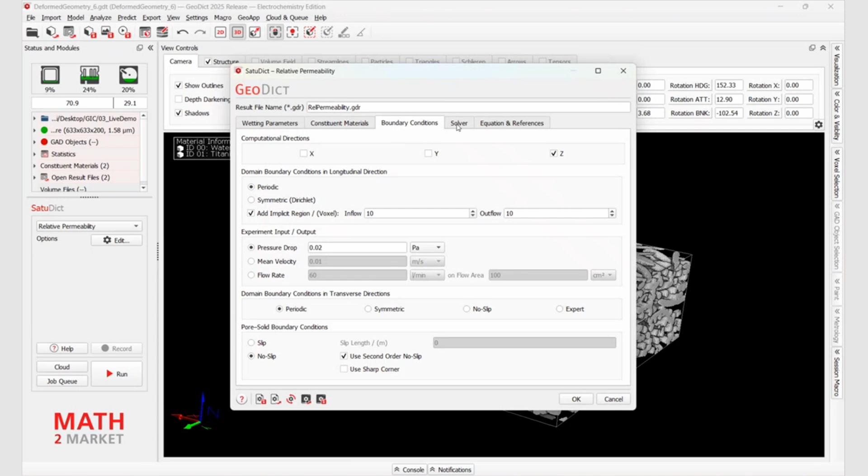Because also in plane, some permeability is needed, because it has to flow somewhere from under the ribs to the channels, and that goes in plane. So it's not only a through-plane flow that happens. We set this up, and then we can compute it, but this also takes too long because it has to do this for all the spots, and also we have to do that for all the compression steps. So we get one result for every one of the 10 steps.

I can just open them. And so we have here 10 different results. If I select them all, we don't see much, but I can combine them. That's rather nice. If I combine them into one plot and enlarge this, we get some plots here that I have computed for the in-plane and through-plane direction.

So for example, for the through-plane direction, we have now here 10 curves. The red one here is step 0, the uncompressed. We have air saturation from 0 to 40%. And then if we go up with the compression level, we move down here. So that's then the function for the 30% compression, and here up to 40% air saturation.

So you could also plot that maybe in 3D, with the saturation on the x-axis, the compression on the y-axis, and the permeability in the third dimension. So you get some kind of shape, and this function you could plug into some upscaled model, and you have the behavior of this material under compression and for different saturations.

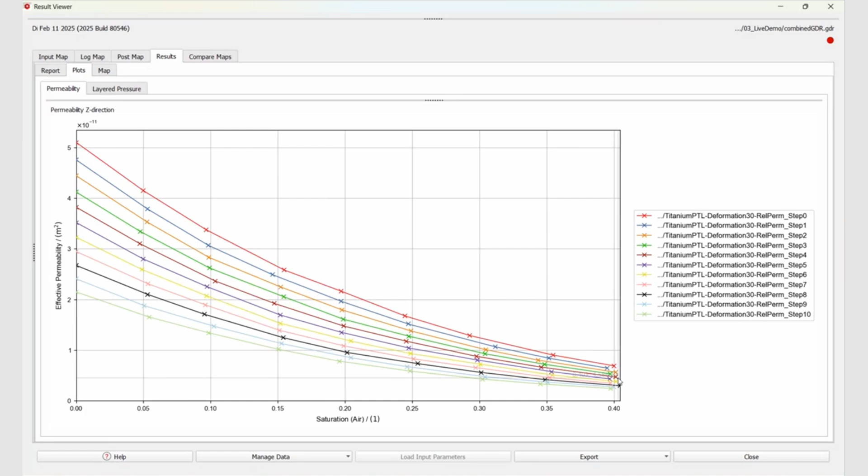And with that I just get back to the talk. And of course, if you have to do this, I use a macro. I don't click through all the 10 steps and everything. I just make a macro where I make a for loop from 0 to 10. In step 0, I take the uncompressed structure, and then I go through these 10 compression levels that I get, and then just always run the same computation on it.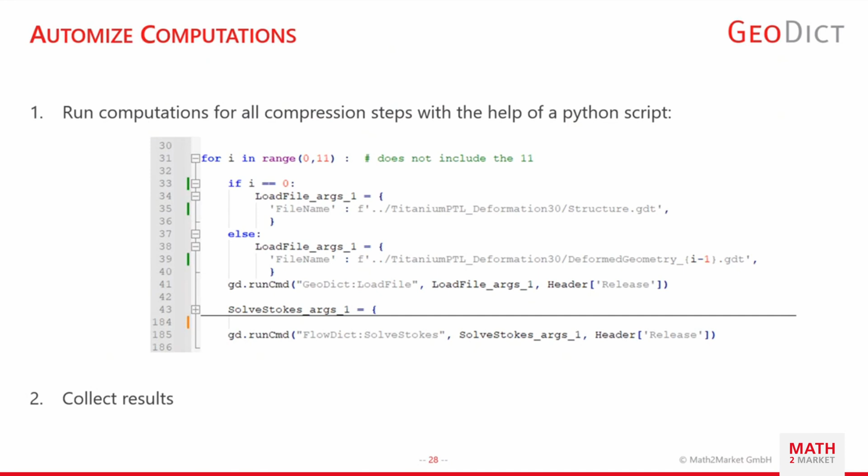And then I just collect the results. So that's how you do it. You don't click through everything, because this way you're also sure that you don't have any differences in the 10 runs, because it always runs through the same code.

So in summary, I've shown you how to generate a 3D structure model of a sintered titanium fiber felt. You can of course vary diameter, porosity, curvature. I just made one quick example of a structure that looks somewhat realistic; it's not some specific structure. I've shown you how you could use GeoDict to mimic sintering. I've shown how you can model in situ compression.

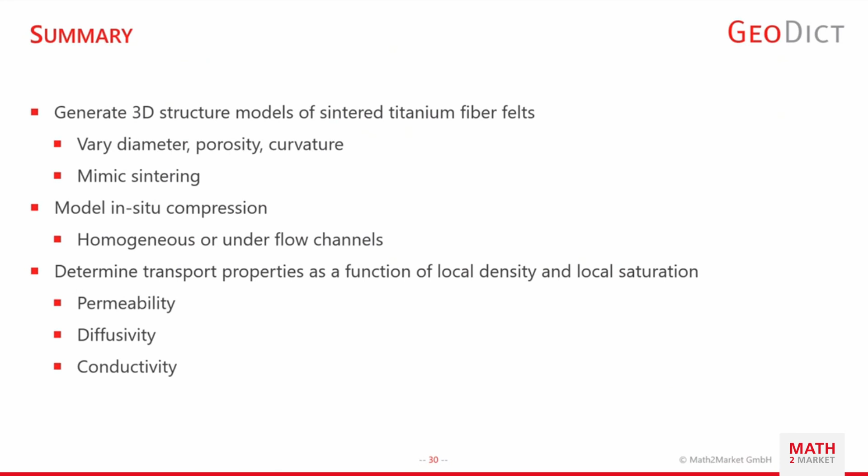You can do that homogeneously or with this flow channel pattern, and then I showed how you can determine transport properties as a function of the local density and local saturation. And of course, you cannot just do that for permeability. You can also do that for diffusivity or conductivity, except that conductivity maybe doesn't depend so much on saturation.

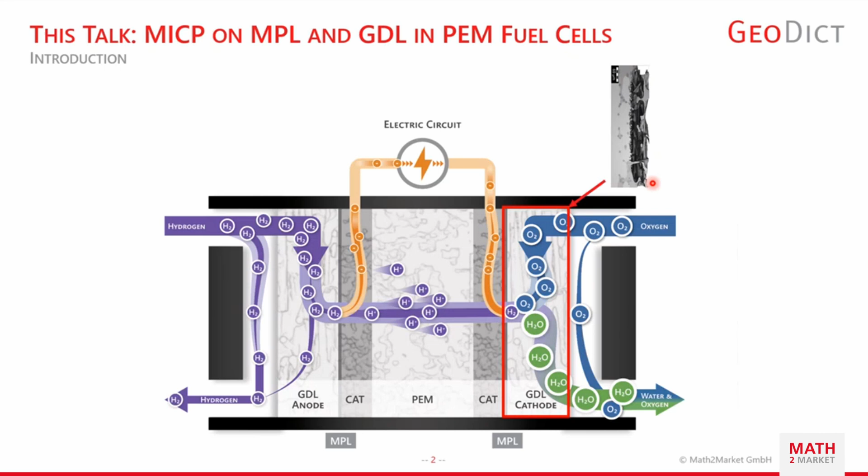So just a short overview of what capillary pressure or mercury injection capillary pressure actually is. In principle, you have a high contact angle of the mercury versus the air on a certain material. High means usually higher than 90 degrees. That is then non-wetting. So you would have to apply an external force to force mercury inside of the structure. And based on the force you will obtain a capillary pressure curve, which means that you get the saturation of the mercury as a function of the pressure.

And why would we like to do that? We would need the knowledge of the capillary forces in the fuel cell to get rid of the water that is in the GDL.

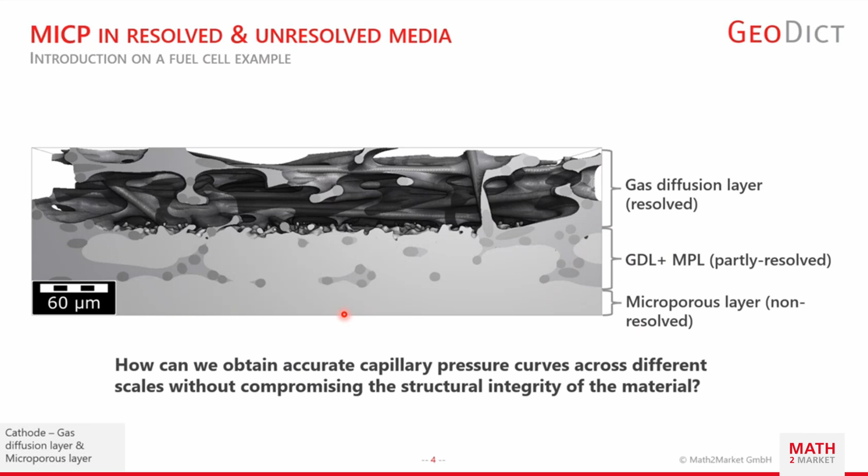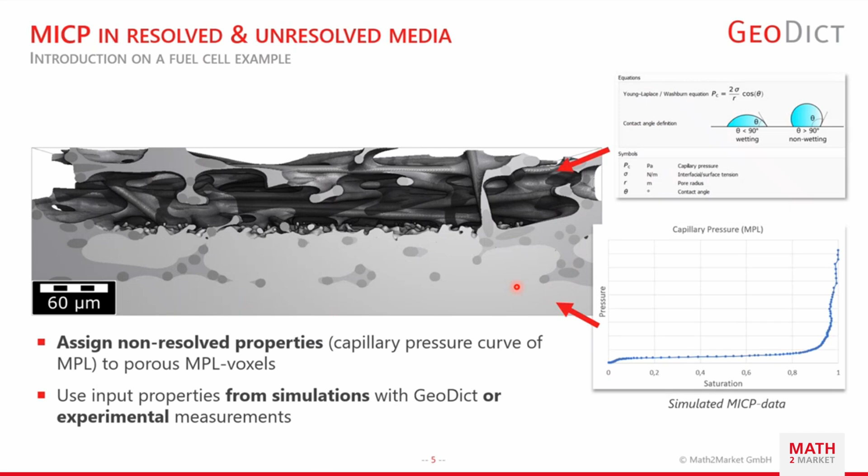So first of all, for doing upscaling, we need the function of the capillary pressure curve for the unresolved part of the structure. That can come from experiments where you have solely analyzed the microporous layer, but that can also come from a former GeoDict computation where you have generated a microporous layer, for example, run the capillary pressure command of the SatuDict module, and then you would be able to assign this capillary pressure function to that porous material on this structure, where you can then, by using upscaling, compute the bulk capillary pressure curve. And that would look like this.

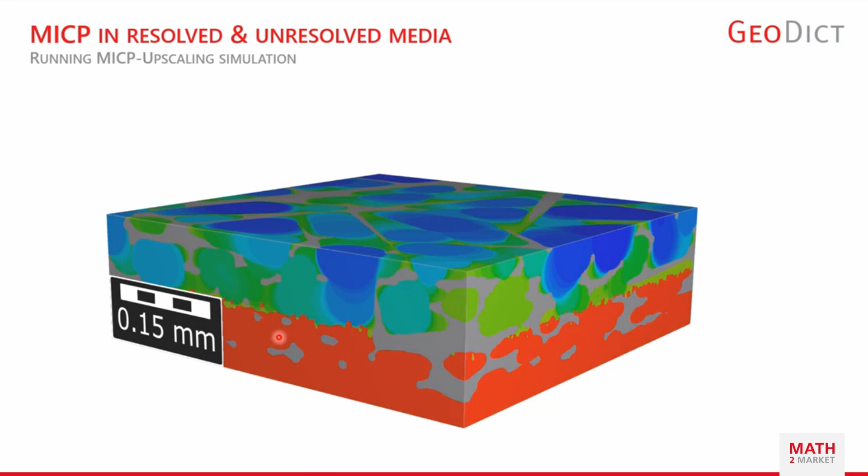The mercury first occupies the resolved part of the structure, and when the pressure becomes high enough, it will also start saturating the unresolved parts of the structure, because then the capillary pressure is high enough to also saturate these unresolved structures.

The GeoApp, or the application, how it was implemented in GeoDict, is rather simple. You can choose from two options of how you would like to populate your porous material inside the GeoDict structure. The first would be that you use the powerful constituent material database in GeoDict, and save the pressure and saturation capillary pressure curve directly into the material. So you're having a material, for example, with the name microporous layer, and that material can have certain properties like porosity, density, but also the capillary pressure curve as well.

So you assign these parameters to that material, and then you would have that graphical user interface in the GeoApp available, where you choose the result file name, from which side the mercury should invade the structure, and upon which saturation you would like your unresolved structure parts to conduct fluids.

So there may be a case where you would like to have a microporous layer that does not consist only of one layer of microporous material, but also maybe of two.

Let's say you want to have the partly resolved microporous layer with GDL as a material and the homogenized microporous layer as a material. Then you would need a certain saturation which you assign to the upper part of the microporous layer to tell GeoDict upon which saturation that layer should conduct the fluid to the next layer. And that is what you change here in that box.

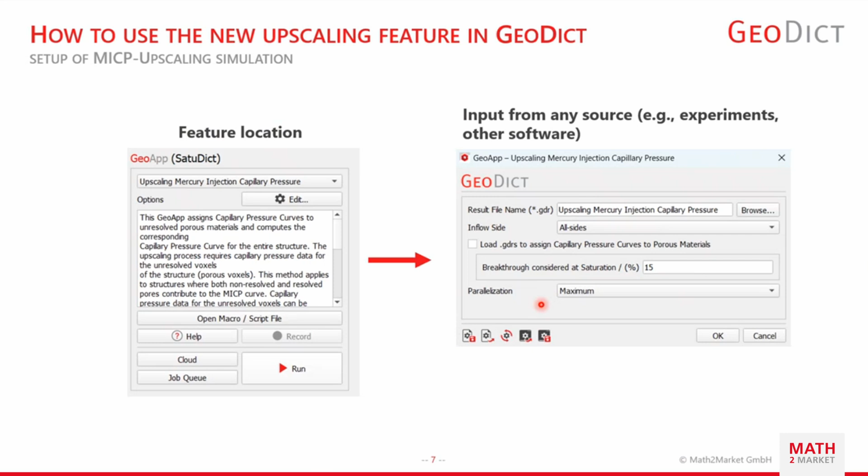The parallelization is simply how many CPU cores GeoDict will use to perform the computation. The other option would be that you simply load the GDR file that comes out of the GeoDict capillary pressure module. So let's assume you have a microporous layer that was generated in GeoDict. Then you can run the capillary pressure curve command on that structure, which you can then use as an input for this GeoApp to assign the capillary pressure curve to the unresolved material in your structure. And that can be done for up to 3 materials at the moment.

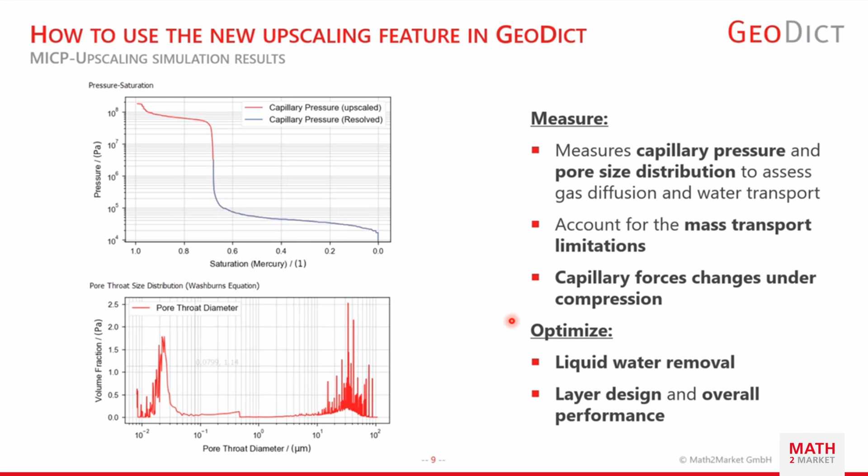But what would the GeoApp be without any verification? We have, for the verification, created 2 structures: a granular structure with high porosity, and one with low porosity. We have now computed on both structures the capillary pressure curve, or mercury intrusion capillary pressure curve, so that we would have a homogenized material information for the high porosity structure on the left-hand side, and for the low porosity structure on the right-hand side.

So we simply transferred the information we have from both structures to the left and to the right-hand side. So each of these 2 areas has one individual capillary pressure curve that can be upscaled directly from only this structure here. And for sanity check, we have also stitched that structure together into an only resolved structure, where we then run the capillary pressure command on. So the idea was, if capillary pressure curves obtained from both of these 2 structures look the same, we know that the upscaling approach works, because we have only resolved structure capillary pressure curves and only non-resolved structures.

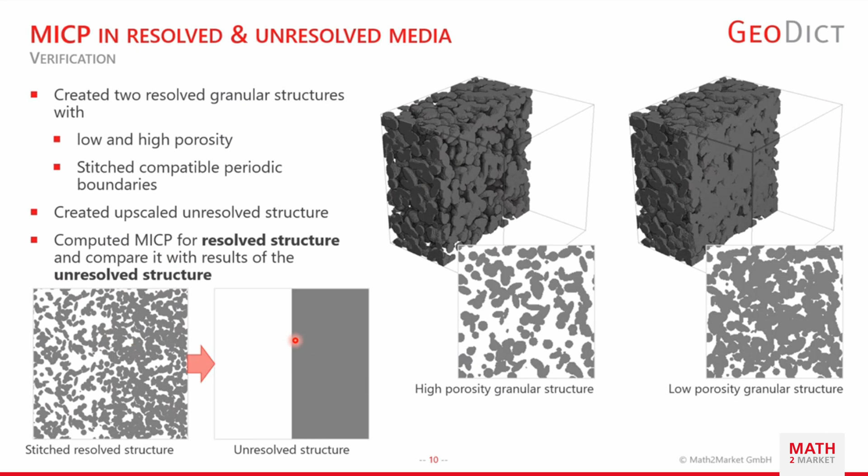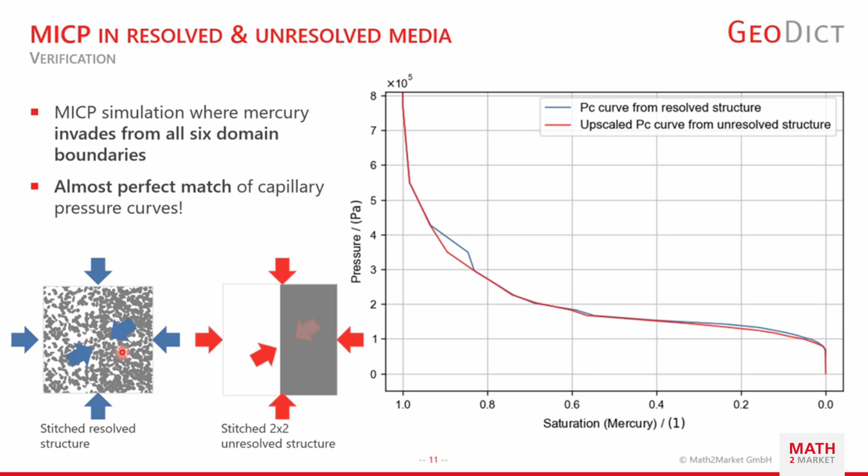But that is only the first step. The next step would be to not only compute the capillary pressure curve, but to also compute the relative properties that can be derived from certain saturation levels of that microporous layer and of the gas diffusion layer. And that will be possible in the GeoDict 2025 version in one of the next service packs. So in principle, it is very easy. You have a saturation, and based on the saturation level, you would like to obtain, let's say, permeabilities, like Jürgen showed you before. Based on a certain water saturation level, you want to obtain the permeability.

That can now also be done if there are porous regions involved. So you have a two-phase flow that is upscaled, so partly saturated MPL and gas diffusion layers. And based on these partly saturated layers, you can then obtain the relative permeability on the basis of different saturation stages of the water. And as shown before in the MICP GeoApp, you can also then use the relative permeability from the unresolved material, and there also from GDR files where you have obtained the relative permeability from the scale below, to populate your model on the scale where you have both porous and non-porous materials present.